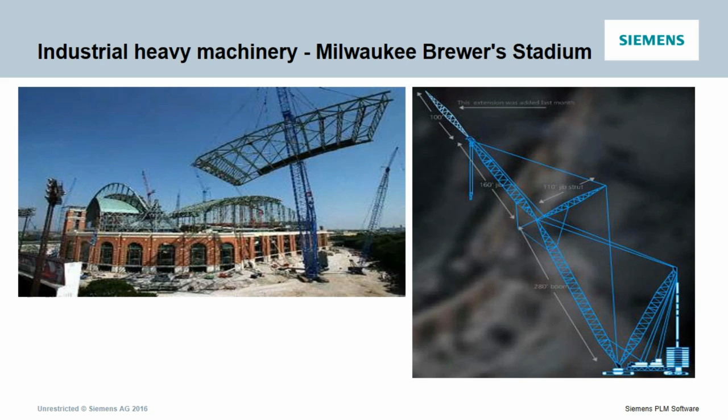This heavy crane was more than strong enough to lift the weight of the roof elements, but still the following happened: at a certain moment, the whole crane simply collapsed.

After an investigation, poor pin design around which the crane rotates was found as the reason for failure. It was designed strong enough for lifting the weight of the roof elements, but still failed after a while. Please follow the link for more detailed info on this case.

In energy production, more and more wind energy is used. The number of wind turbine installations has increased in the last 10 years, as well as the number of accidents. Two types of structural accidents are common: blade failures and tower failures.

Most often, blade failures occur, where either the whole blade or pieces of it break off and are launched in the air. In Germany, pieces of blades are documented to have traveled 1,300 meters, going through the roof and walls of nearby buildings. This is one of the reasons, next to noise issues, why there is a minimum distance of at least 2 kilometers between the turbines and occupied housing areas.

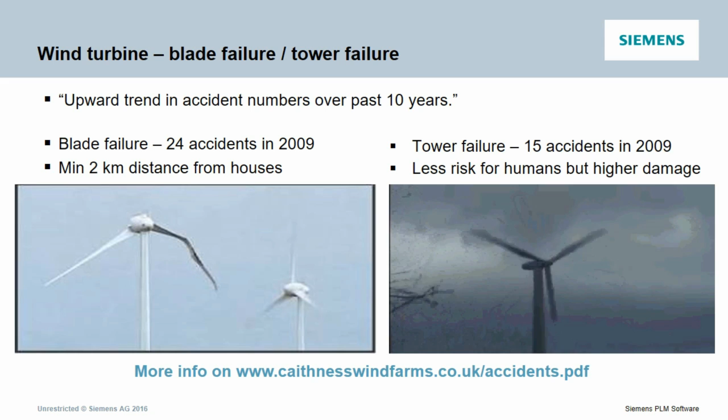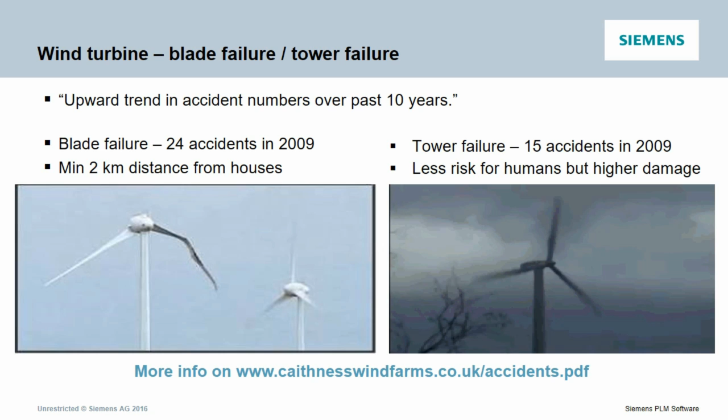A second possible failure is when the whole tower collapses. This can be caused by exceptional storm winds, but also poor quality control and lack of maintenance can be likely causes. In this case, the damage to the turbine can be much more severe because there is a risk that the entire turbine could be destroyed. But the risk to humans is lower since all parts stay within a relatively short distance from the turbine.

As a last example, please check this more recent case of the I-35 bridge collapse in 2007. The bridge was built in 1967 and carried an average of 140,000 vehicles a day, which illustrates the fact that it is a very solid and strong bridge. On top of this, regular visual inspections were carried out, so nobody could suspect the sudden failure of the bridge.

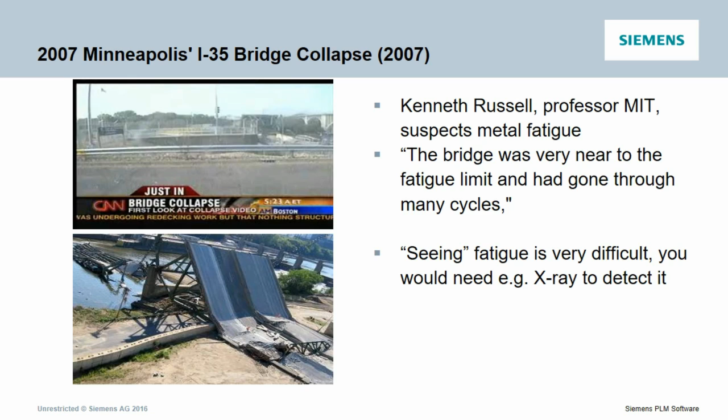So what was the reason? Due to the many cyclic loadings on the bridge, because of the traffic going over it, the bridge reached its so-called fatigue limit and collapsed. This was not discovered during the regular visual inspections, as it required more advanced techniques like X-rays to detect fatigue deterioration. Why did this happen, and after all those years? That is exactly what fatigue is all about, and what we will explain in the next pages.

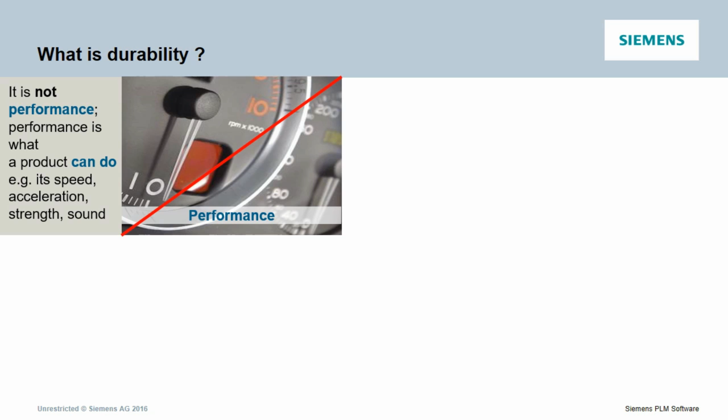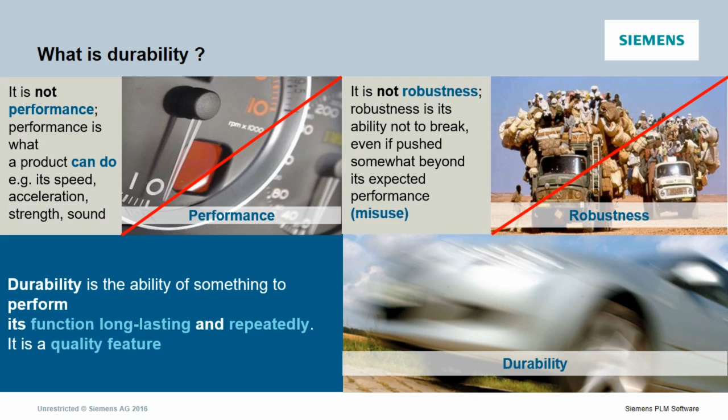So, what do we mean when talking about durability? Or more importantly, what is it not? First of all, durability should not be confused with performance. Performance is the implicit ability of a product, for example, how fast a machine can run or how much horsepower it produces. Durability is also not the same as robustness, which is the ability to withstand high loads without breaking. When we talk about durability, implicitly there is a time factor involved, meaning the product can survive a specific lifespan under normal circumstances.

In short, durability is a measure of product quality. When designing your product and thinking about its durability, please keep in mind how your customer will use it. Do you know where the product will be used? The same car will be used in a variety of environments: the desert, perhaps standard city driving, or in the snow. Do you understand how tough the conditions will be? Driving through potholes and over cobblestones introduces different loads than city or highway driving.

Do you know how fast your product will go? Driving at 30 miles per hour is different than driving at 100 miles per hour. Do you know how often it will be used? A taxi will drive much more on city roads compared to driving a family car continuously on the highway. Do you know how long it should last? Designing a truck which needs to last for 1 million kilometers brings some extra challenges into the picture compared to designing a production car for 250,000 kilometers. Since you always should have a specific end-user case in mind, the above questions are important when building durable products.

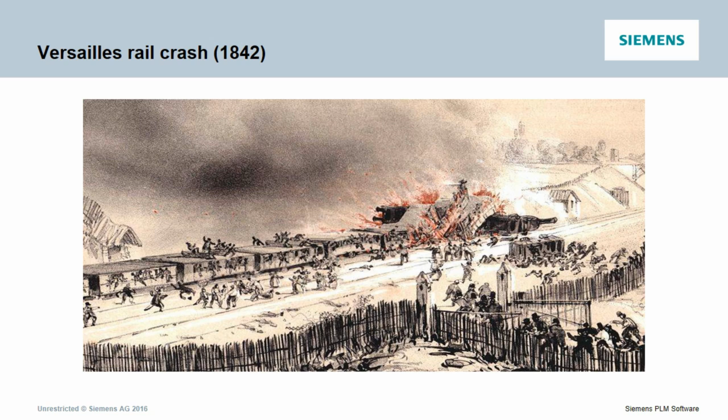In order to understand durability, one needs to study the underlying engineering phenomenon called fatigue. People first started investigating fatigue after the train crash of 1842 in Versailles, a French city west of Paris. At least 55 passengers were killed in this accident, caused by a broken locomotive axle which led the train to derail. Engineers working in the railroad industry started investigating the accident in detail.

Although the axle was more than strong enough to handle the weight of the locomotive, engineers discovered that the cyclic nature of the rolling axle was the cause of failure. As the train moves, the axle rotates, and the full weight of the locomotive pushes down on it. On the surface of the axle, there is a continuous change from tension to compression back to tension within one rotation cycle.

Wöhler discovered back in 1870 that applying these elastic deformations repeatedly would break the axle after a certain number of cycles, even at stress levels far below what's needed to break the part instantly. So cyclic stress turned out to be more damaging in the long term than instantaneous peak stress. Wöhler found that by reducing the amplitude of the applied cyclic stress, the part would survive many more cycles. This behavior became known as fatigue, because it was originally thought the metal got tired after a while.

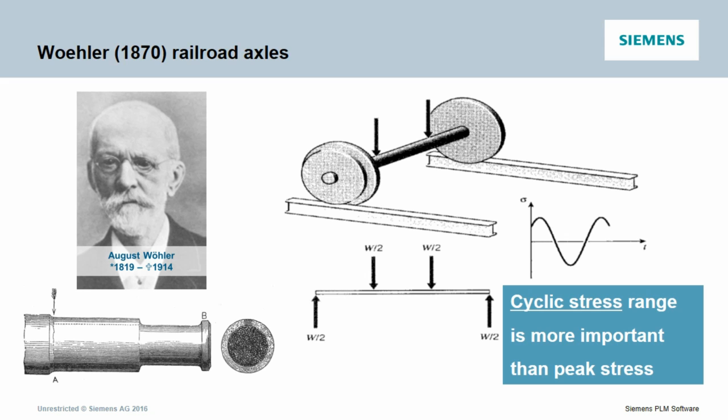The previous example teaches us there is a big difference between static strength and strength after cyclic loading. For static strength testing, a monotonic load is applied and increased until the component or structure fails. The force or static load needed to break the material is called the static strength. Here you see some examples of setups for experimentally testing static strength.

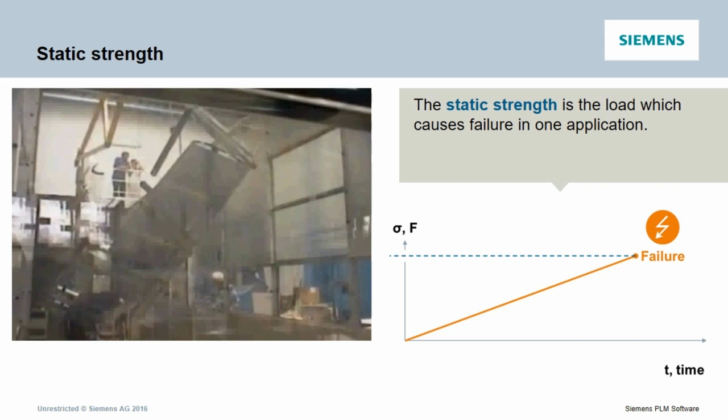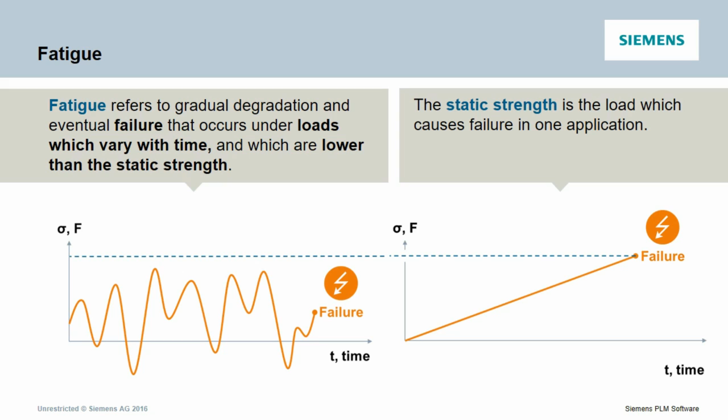Sandbags or cords are used to apply the static loading condition, but static strength is not what we are dealing with when we refer to durability. Instead of a static load condition, the term fatigue always refers to the gradual degradation and possible failure that occurs under loads which vary in time. Typical for fatigue is that failure is not immediate, but only happens after some time, and that this failure is caused by a cyclic loading pattern rather than a monotonic load. In most cases, the loading amplitude is typically lower than the static strength of the material.

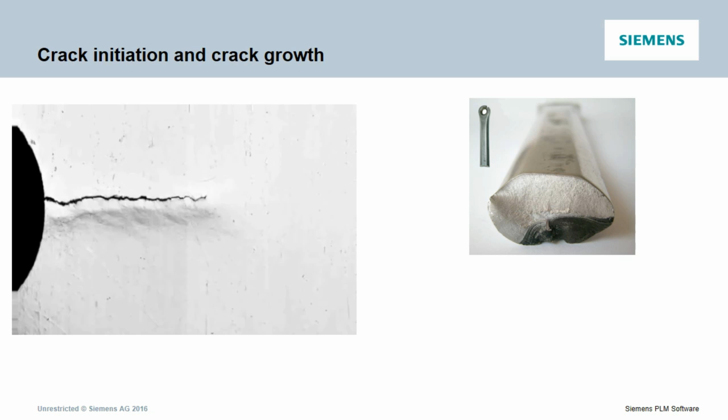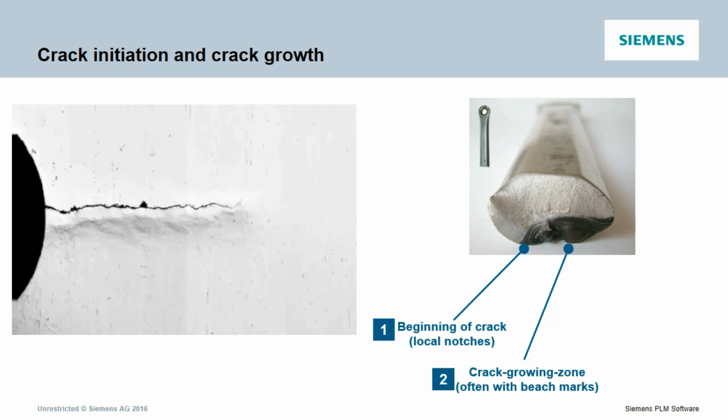The reason cyclic loads cause fatigue failure can be found in what is called crack growth. Crack growth occurs after a crack initiation on the surface, as you can see in the picture on the left. This initial crack can literally grow toward the interior due to cyclic loading, which opens and closes the crack each time. Once the crack has penetrated the material enough, the remaining undamaged surface is too small to withstand the loads, and the material suddenly breaks into pieces.

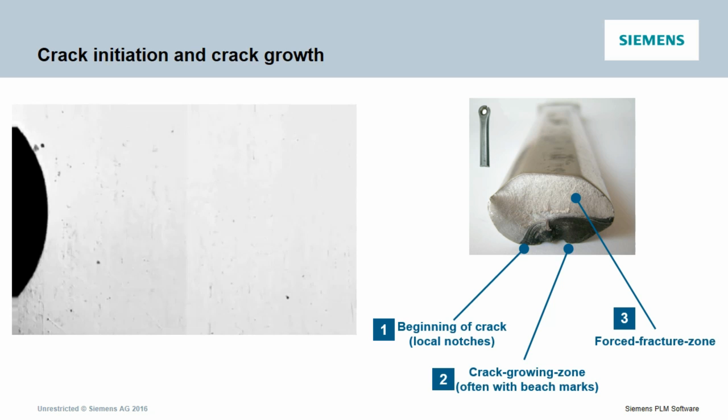This is known as fatigue failure. It is the reason for the apparently sudden failure in all the previous examples. When examining components that failed due to fatigue, one can clearly see the location where the crack started and the area where the crack grew.

On the right, a metal steering arm failed because it did not receive the required final heat treatment. Without this heat treatment, residual stresses remain in the steel, causing it to be 30% weaker than normally specified.

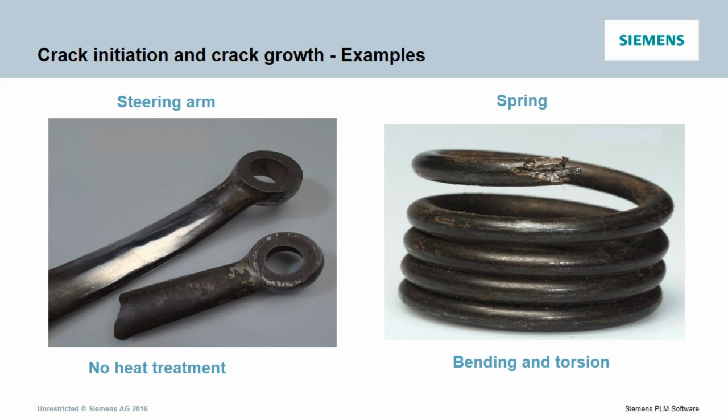The picture on the right shows a truck spring where the loads consisted of a combination of bending and torsion. Here, the crack growth is very complex, and as you can see, the fracture surface is very rough and difficult to see, even when zooming in.

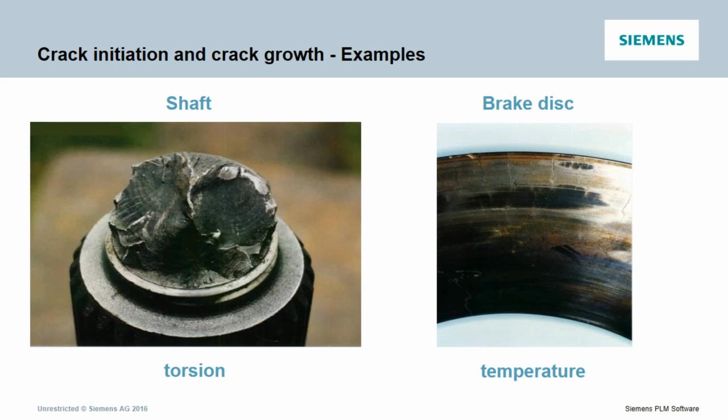This first picture shows a failure in a drivetrain shaft. Due to torsional vibrations and cyclic variations in rotation speed during operation, crack growth occurred and led to failure. The last example displays a brake disc. During braking, friction quickly heats up the metal, and the cyclic heating and cooling started the crack initiation.

What is an SN curve? Imagine the following experiment with some metal paperclips, which you can easily try yourself. Take the end of a paperclip and bend it 45 degrees in one direction, then back 45 degrees in the other direction, and again back to its initial position. You have just applied one cycle over an angle of 45 degrees.

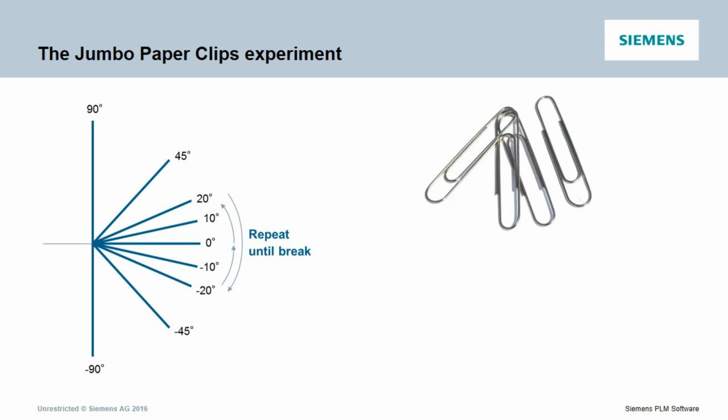This causes a cyclic change between tension and compression of the material. If you repeat this a few times, you will notice the paperclip breaks after a while. Count the number of cycles it takes before it fails. In this example, 7 cycles. Continue the experiment and apply different deformation angles. You'll notice the number of cycles will be different. Actually, the lower the applied angle, the higher the number of cycles needed to break the paperclip. The table shows possible results for angle and number of cycles for this experiment.

If we plot the data points from the previous experiment on a logarithmic scale, the result is similar to the so-called SN curve. In our experiment, we plotted the angle versus the number of cycles, but a true SN curve plots the cyclic stress amplitude S against the logarithm of the number of cycles to failure, N. As the applied angle is proportional to the stress amplitude, a similar curve is obtained.

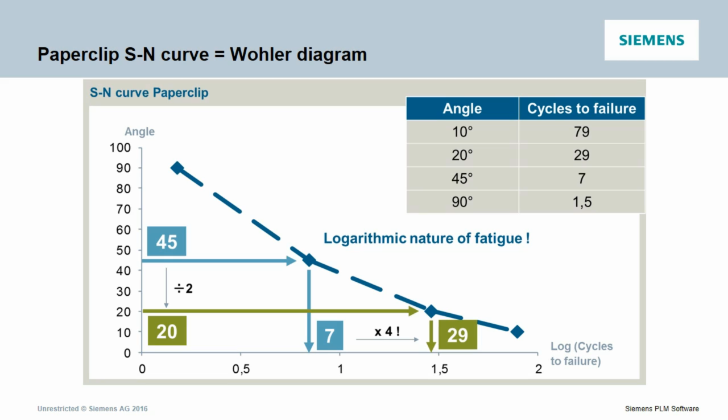An important characteristic of the SN curve is the logarithmic nature of fatigue. If we reduce the load by a factor of 2, from 45 degrees to 20 degrees, the number of cycles to failure does not increase by a factor of 2, but by a factor of 4, from 7 cycles to 29 cycles approximately. This logarithmic relationship between stress and cycles to failure was discovered in 1910 by an American engineer named Basquin, who further studied and analyzed the work of Wöhler.

The logarithmic nature of fatigue means that a slight decrease in applied loading results in a huge improvement of fatigue life. A typical K-factor, or Basquin coefficient, determines the relationship between load and expected lifespan. For steel, this factor equals 5, while for aluminum it equals 7, and for welding it equals 3.

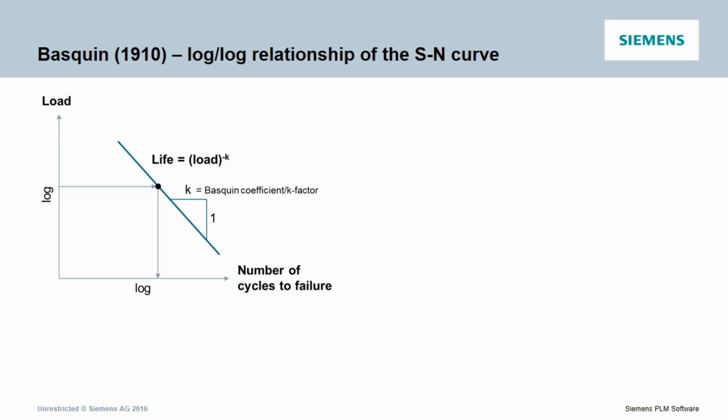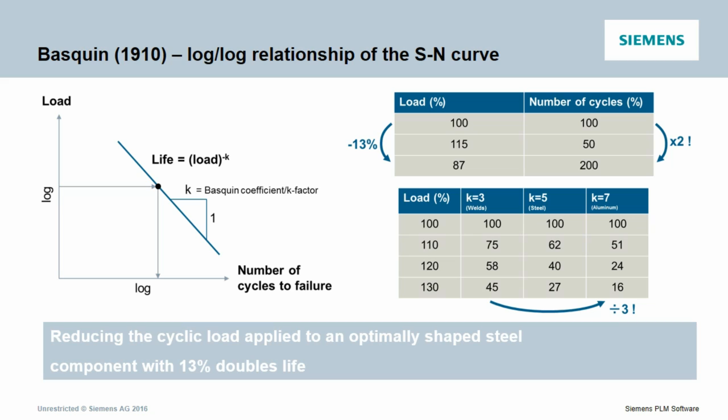The table on the right shows the effect on steel. Increasing the load by only 15% will reduce the lifespan by 50%, whereas reducing the load by only 13% will double the expected lifespan of the component.

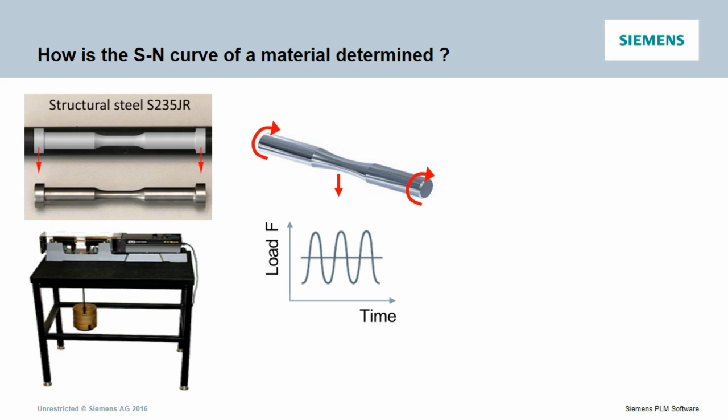In practice, the K-factor and SN curve are determined in a laboratory environment using a test bench. A round sample is rotated and bent by hanging a fixed weight, applying a known constant stress level. As the sample rotates, stress is applied externally on the entire sample, varying from maximum tensile to zero to maximum compressive and back. The test system counts the number of rotations, or cycles, until the specimen fails.

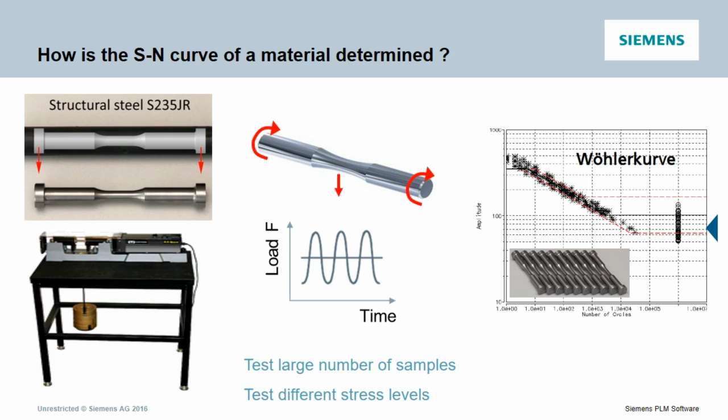A large number of tests are performed at each stress level in order to statistically average the results. On the right, you see a typical test sample. Its optimized shape and highly polished surface guarantee an optimal lifetime.

When looking at the SN curves from different materials, another important difference can be observed. In the case of steel, below a 300 MPa stress level, the material will survive at least 10 million cycles without failure. This stress level is called the endurance limit and appears as a horizontal line on the SN curve. As long as you keep the stress level below this endurance limit, the steel component will survive forever.

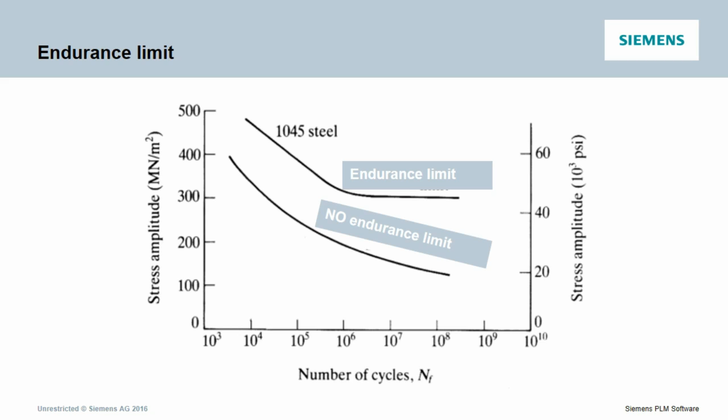Note that not all materials have an endurance limit. For example, with aluminum, even a very low stress level will lead to failure as long as the number of cycles is high enough.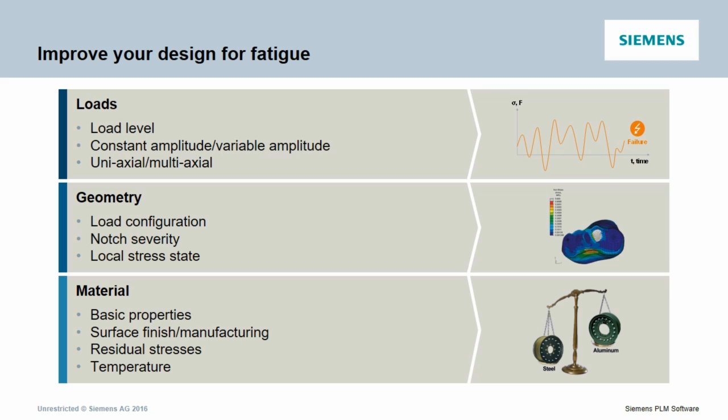Which parameters influence fatigue? In order to improve the fatigue lifetime of a component, one can work on three influential parameters: the loads, the geometry, and the material. Let's first look at the loads.

Remember that with the logarithmic nature of the SN curve, reducing the loads will drastically extend the lifetime. Until now, we only talked about fully reversible loading, meaning the loading is symmetrical around a zero mean stress level. Please be aware that in reality this is probably not the case, and other parameters like mean stress or multi-axial loading can influence the fatigue life.

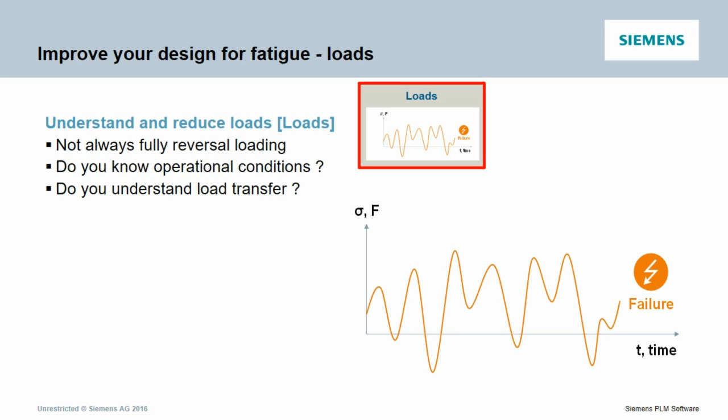So we return to one of the basic questions: how is the customer using the product, or what are the loading conditions in real-life situations? Using realistic loading conditions is crucial when predicting a realistic fatigue lifetime. It is also important to understand how the external loads are transferred to the inside components, and to know for each component what the specific loading conditions are.

Measuring realistic loads is extremely important, but how can we measure these loads? In fact, load data is collected by measuring strain. Strain is defined as the relative change in length of a component due to tension or compression. In order to measure this change in length, a so-called strain gauge sensor can be used.

A strain gauge consists of a very long resistive wire that is embedded in a thin foil and glued on the surface of the structure. The wire is typically made of a copper-nickel or nickel-chrome alloy. When the structure deforms, the length of the resistive wire changes as it gets longer for tension and shorter for compression. Since the change in length influences the electrical resistance of the wire, measuring this resistance gives an idea about the stress levels in the material.

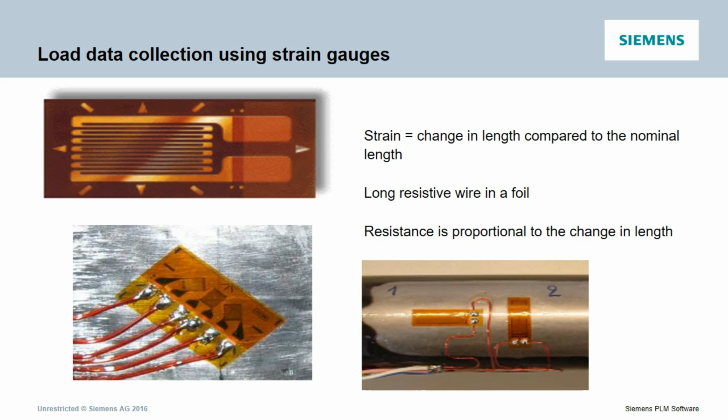Typically, the measured resistance change is very small, and therefore also the typical strain values. That's why we often use microstrain as a unit, as the amplitudes are often in the range of 10 to the minus 6. Often, multiple strain gauges are combined into a Wheatstone bridge to compensate for temperature variations, or in a rosette configuration to have information for different directions.

Next to understanding the loads, a second way of improving the fatigue life is by looking at the geometrical shape of the component. The shape itself will contribute to how the stress is distributed inside the component. High localized stress concentrations can occur around notches or sharp edges or wherever the material is very thin. This means you have to be careful when trying to reduce weight by reducing material. Maybe the static strength is still okay, but the risk for fatigue will increase.

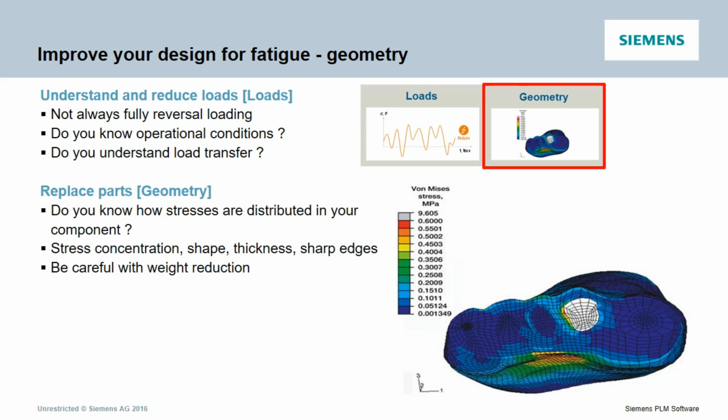High localized stress means increased risk for crack initiation and propagation and final fatigue failure. Testing, as well as simulating the local stress distribution, can help build competence and better understand the fatigue behavior of certain components. Next to the loads and geometry, material can highly influence the fatigue life of a structure.

It is obvious that a certain material is stronger than another. A soda can made out of steel would be stronger, but also much heavier than the aluminum version. On the other hand, soda cans don't have to survive a lot of fatigue cycles, so aluminum is a perfect material. Next to the material itself, also other factors can influence the fatigue behavior.

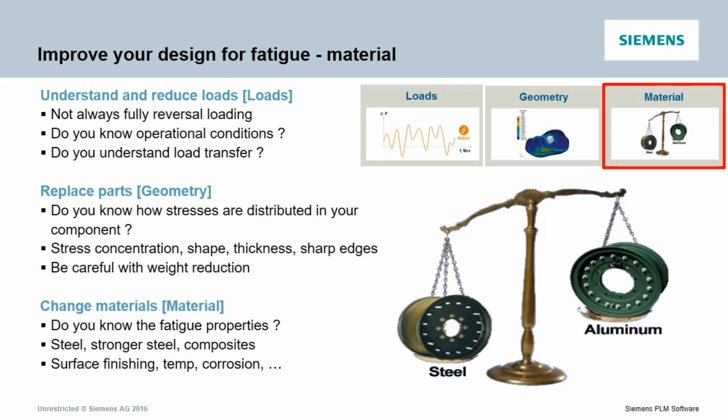For example, the quality of the surface finishing. Other reasons for accelerated degradation could be corrosion, chemical environment, residual stresses from the manufacturing phase, or even the environmental temperature. A metal component will behave differently and have a different lifetime in Arctic temperatures than in tropical environments.

How to design against fatigue. There are three possible strategies when designing against fatigue: infinite life, finite or fixed life, and damage-tolerant design.

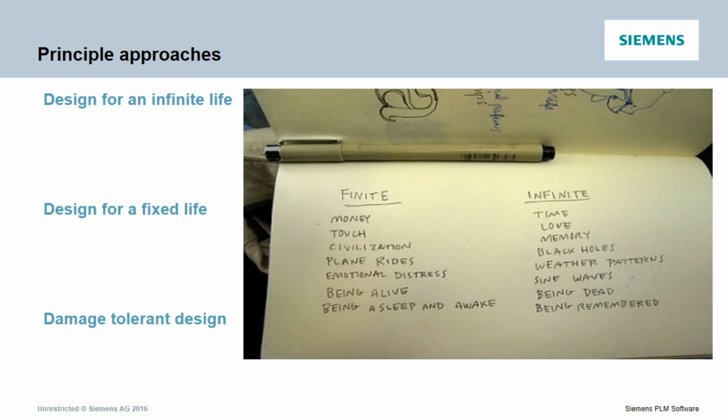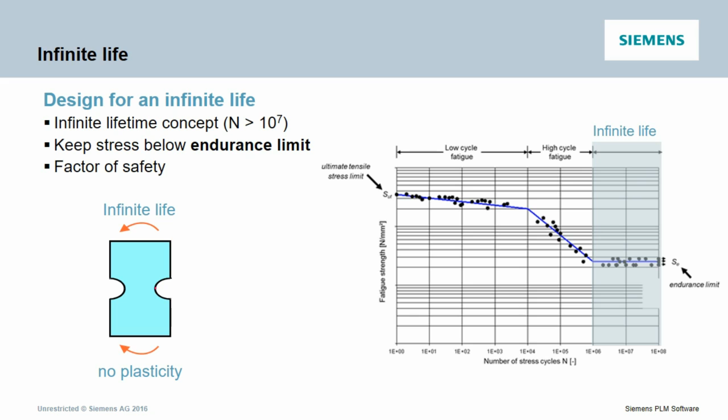An additional safety factor is typically used in order to stay well below the limit and assure infinite life without failure. In this case, the stress levels are low enough for all deformations to be elastic, and there is no plastic deformation at local notches. Please remember that not all materials have an endurance limit. For example, aluminum cannot be used for an infinite life approach.

In order to assess the infinite life, the following approach is taken. Under loads, for the loads, it is enough to look at the minimum and maximum condition and apply a stress concentration factor to compensate for local high stresses.

Under geometry and material, for the material properties, one starts from the ideal SN curve of the polished specimen and accounts for the real surface finishing and loading conditions. A real-life endurance limit will be used instead of the one from the original SN curve.

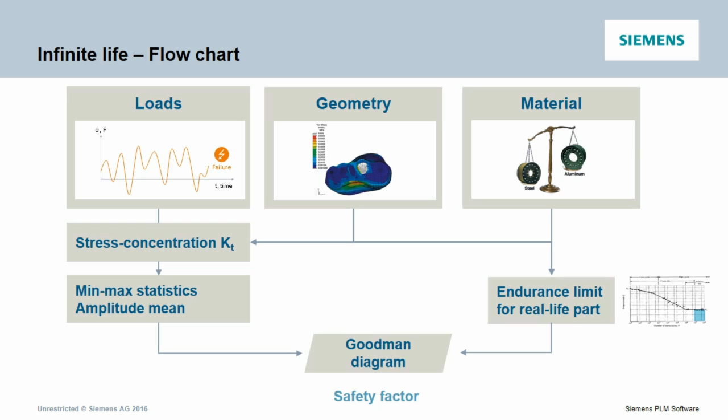Loads, geometry, and material properties are combined in the Goodman diagram, and this results in a calculated safety factor which will tell if the component will survive or not.

A second approach is to design for a fixed or finite life. This means that the lifetime is known to be limited, but at least the user can be instructed to replace the component with a new one after a specific time. This is the concept of a safe life design, as a safe lifetime can be guaranteed based on completed fatigue calculations. Typically, a distinction is made between high cycle and low cycle fatigue.

High cycle means the component is designed to survive between 10,000 and 10 million cycles. Here the deformation is primarily elastic of nature. Low cycle means the component is only able to survive a maximum of 10,000 cycles.

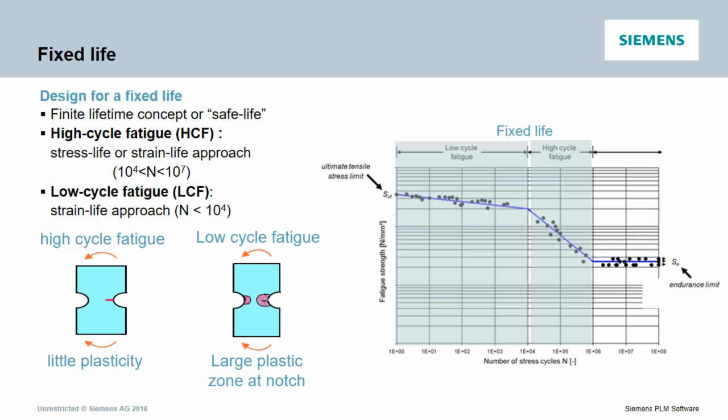Note that many components do not need to survive that many cycles. For example, something loaded once a day for 20 years only undergoes 7,300 cycles.

In order to assess the fixed life, a slightly different approach is taken. Instead of just looking at minimum and maximum loads, a more advanced analysis needs to be done, called rainflow counting. Using rainflow counting, a complex loading sequence with variable amplitudes is decomposed into a number of loading sequences with fixed amplitudes. Let's have a look how that works in practice.

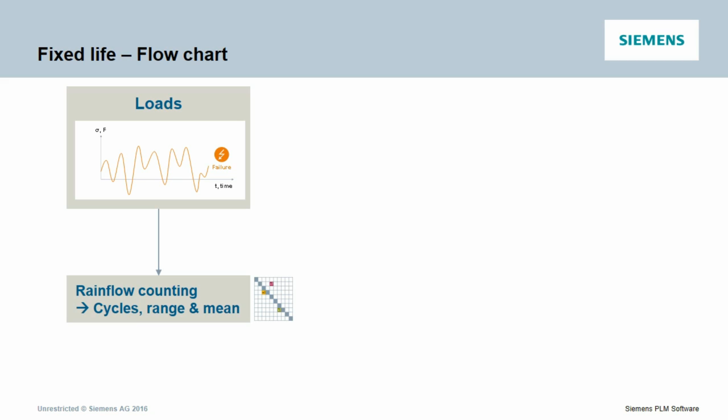Rainflow counting was introduced by the Japanese professor Endo. It is a technique used to analyze variable loading conditions for fatigue life prediction. Starting from the original and complex loading sequence, the amplitude of the loads is first divided into a number of classes or bins. Each combination of a local maximum and minimum is then isolated, and the number of these from-to transitions is counted and put in a rainflow matrix.

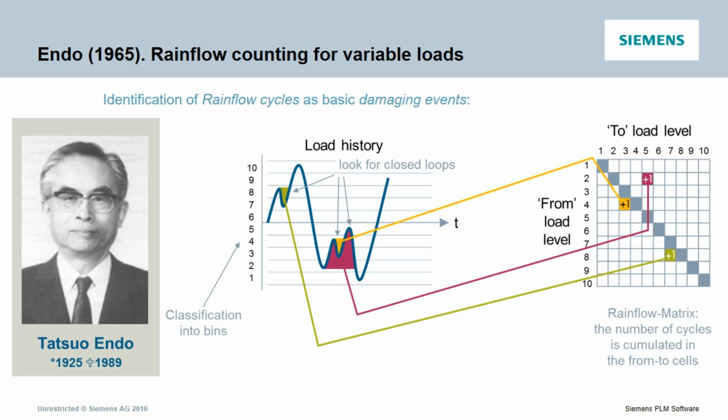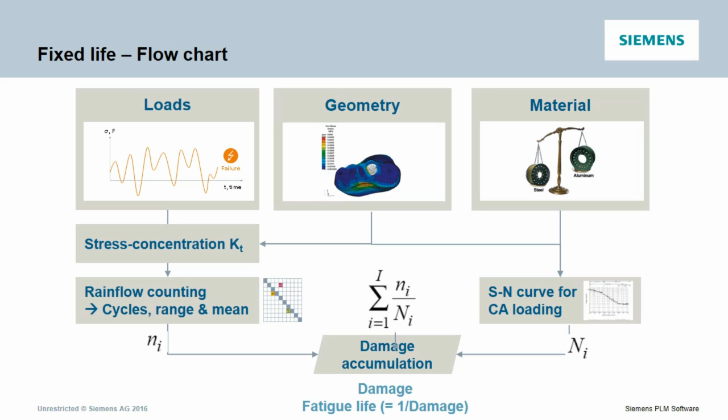The rainflow matrix shows the number of occurrences or cycles from a certain level to a certain level. Based on the number of cycles in the rainflow matrix and the SN curve, the damage effect of each cycle can be calculated. Using Miner's rule, the different partial damages can be summed up into a total accumulated pseudo-damage. As a result, one obtains a fatigue life factor, which is the number of times one can repeat the initial loading sequence.

The last approach is called the damage-tolerant design. In this case, prediction of the lifetime is not done, but the user is instructed to do regular inspections and look for cracks. Once the cracks exceed a critical length, the part should simply be replaced.

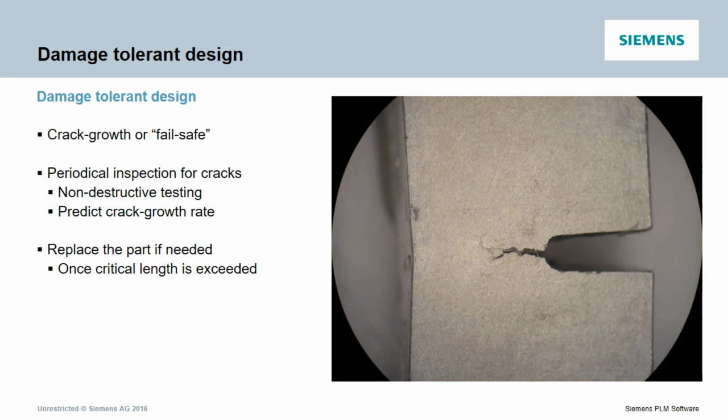For the inspection, typically non-destructive testing like ultrasonic methods are used. Once a crack is discovered, an accurate prediction of the crack growth rate until the next inspection is needed to decide on component replacement.

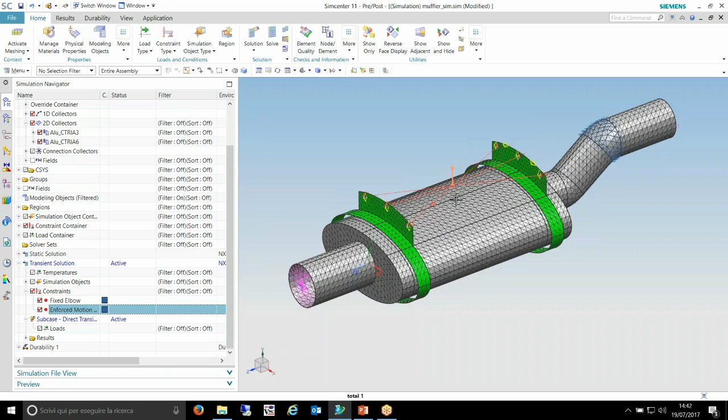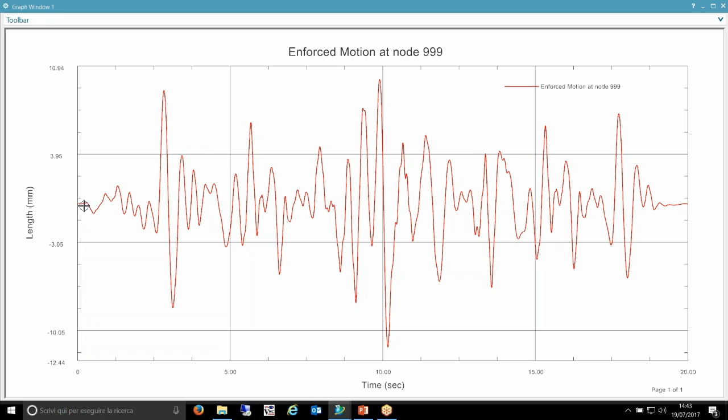In questo modo vado a vedere quello che potrebbe essere un profilo tipico di un tratto di strada. Questo lo devo ripetere però tantissime volte, diciamo un 10, 10 milioni di cicli. Quindi abbiamo bisogno di studiare una fatica particolare, nel senso che è composta sia da una parte a breve termine, sia da una parte a lungo termine.

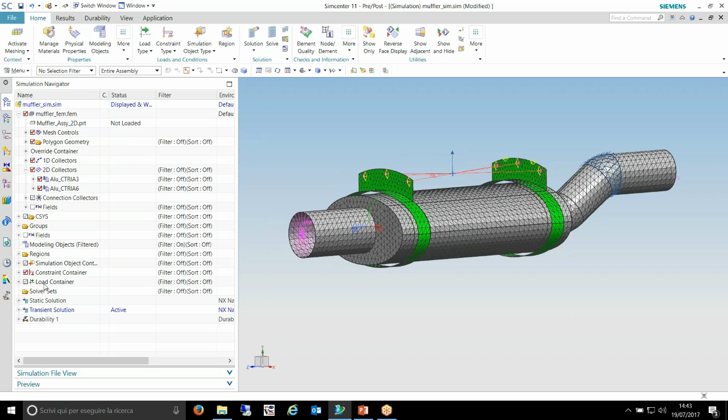Quindi utilizzeremo, infatti sono stati salvati, se andiamo a vedere dei risultati per quanto riguarda la parte statica, quindi analisi statica lineare, sia gli stress che gli strain. Per quanto riguarda la soluzione transitoria invece abbiamo salvato soltanto la parte di stress, in quanto è quella più interessante, visto che lavoriamo ad alto numero di cicli, non ci interessa più il discorso dello strain.

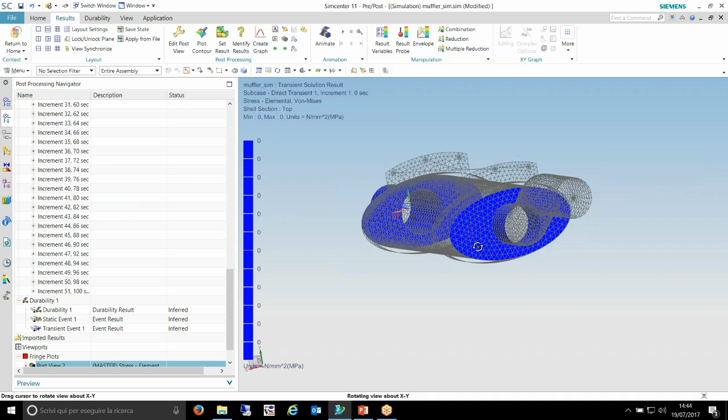In questo caso, se attiviamo l'animazione possiamo vedere, sulle iterazioni, dalla prima all'ultima, posso dare il via, vedete come in base alla posizione in cui ci troviamo c'è una zona che si carica più o meno.

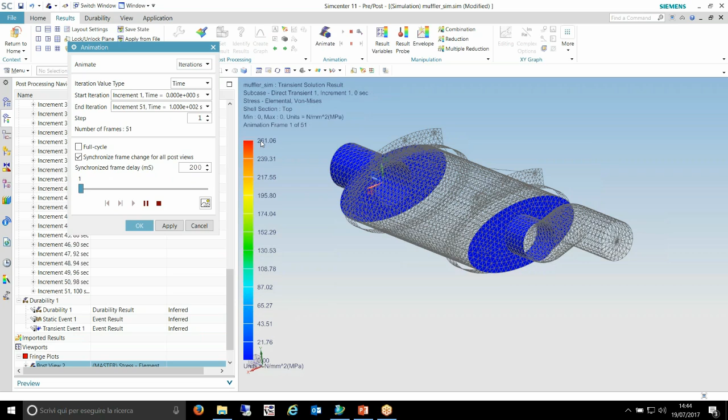Qui lo stress è molto più basso, abbiamo detto che eravamo sui 300 di snervamento, siamo a 260, siamo al di sotto, quindi in una zona diciamo tranquilla.

Ok, una volta che abbiamo questi dati partiamo con l'impostazione vera e propria dell'analisi a fatica, quindi torniamo al nostro modellino e andiamo a creare con i menu di durability una nuova simulazione. La chiamiamo Mixed Time Mixed perché andiamo a mescolare entrambi i nostri casi e su questo andiamo a creare i nostri eventi. Cosa possono essere?

Allora, intanto qui veniamo aiutati da questa interfaccia che è decisamente molto intuitiva. Andiamo a selezionare che tipo di evento. È un evento statico, quindi è un evento ad ampiezza costante, anche con una sigma media presente, ma comunque costante nel tempo, e quindi ci baseremo sulle soluzioni di statica lineare, tipicamente in questo caso la SOL 101, oppure un'analisi

transitoria che potrà prendere i dati da tutte quelle analisi transitorie che possono essere, ad esempio, una risposta nel tempo, quindi una dinamica time history, oppure un non lineare nel tempo. Infine abbiamo l'ultimo caso, che è quello utilizzato in particolari settori come quello automotive, che è il random event. Il random event prevede di prendere i dati da una analisi PSD, quindi una power spectral density, significa poter studiare vibrazioni random, qualora io non sappia a priori esattamente cosa va a succedere.

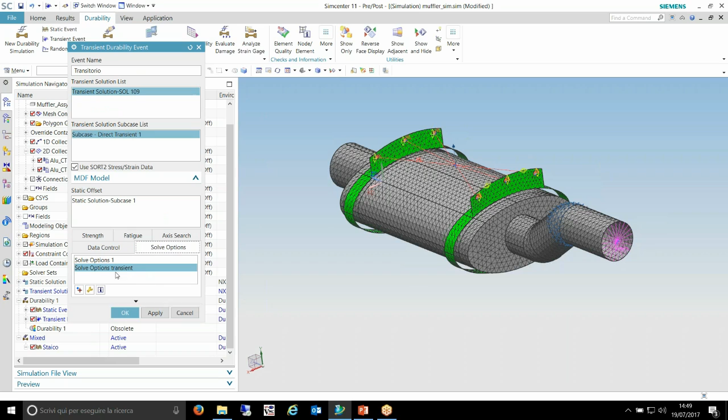Per quanto riguarda le solve option abbiamo una leggera differenza perché su questo modello abbiamo creato un gruppo per far vedere la possibilità di limitare le zone di calcolo, in modo da non dover risolvere tutto, che potrebbe essere dispendioso come tempo, ma andiamo a risolvere soltanto nelle zone predefinite dove sappiamo che lo stress è più alto, identificato già a priori con l'analisi statica e con l'analisi transitoria.

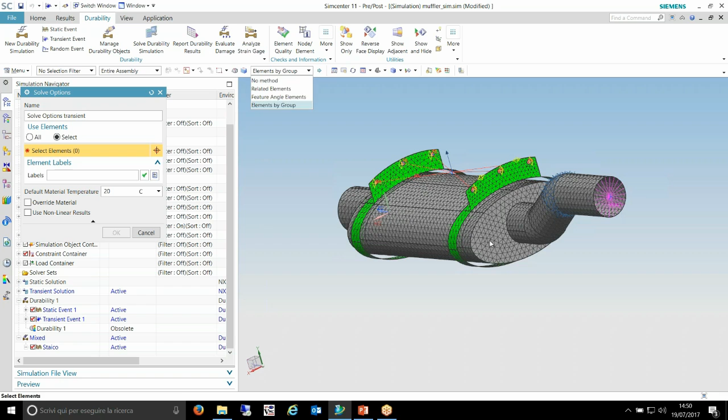Possiamo tranquillamente limitarci, e questo si fa in modo velocissimo: basta selezionare element by group, e una volta definito il gruppo mi basta cliccare un solo elemento e mi vengono presi correttamente tutti quanti. Ok, abbiamo creato il nostro oggetto e siamo pronti.

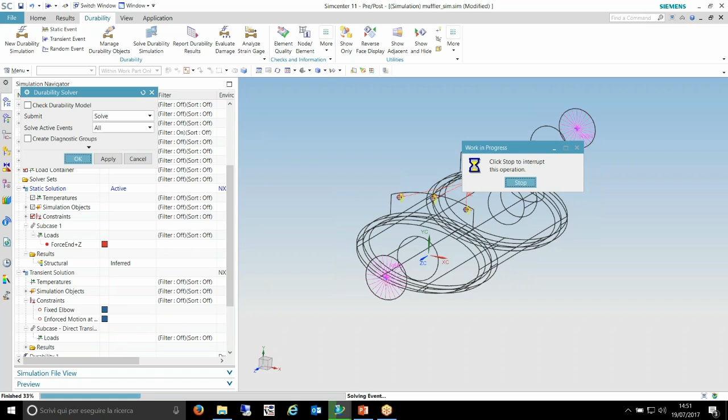Benissimo, a questo punto non ci resta altro che dire risolvi. Possiamo risolvere tutto, solo una parte e così via, diamo l'ok, parte la soluzione, viene suddiviso, vengono eseguite le analisi.

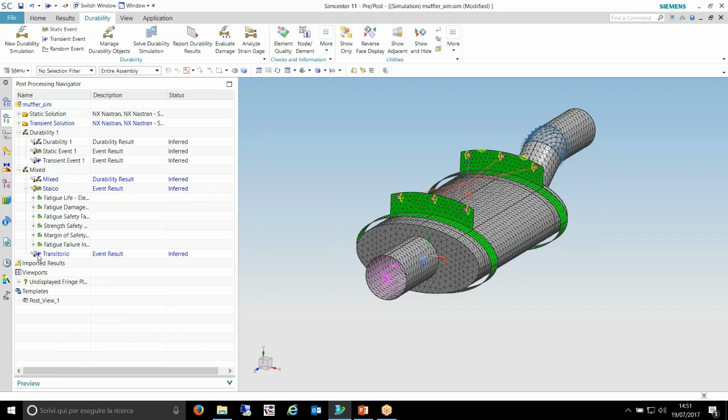La cosa interessante è che quando definisco più di un elemento di fatica all'interno del modello, quindi più di un evento, avrò nel mixed, abbiamo scritto statico, lo possiamo correggere al volo, abbiamo la nostra analisi e avremo i risultati sia per lo statico sia per il transitorio separati, e la somma.

Se andiamo a vedere, abbiamo plottato l'andamento del fattore di sicurezza per il caso statico, quello che avrà le deformazioni maggiori. Capita spesso che con i fattori di sicurezza sia da invertire la griglia, perché non stiamo parlando di stress dove più alto è più pericoloso, ma è il viceversa.

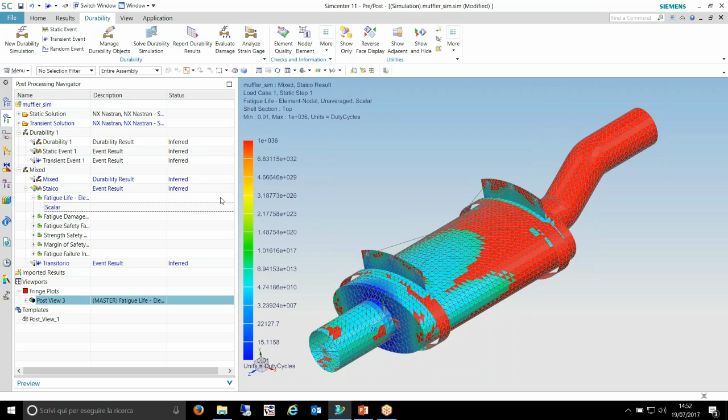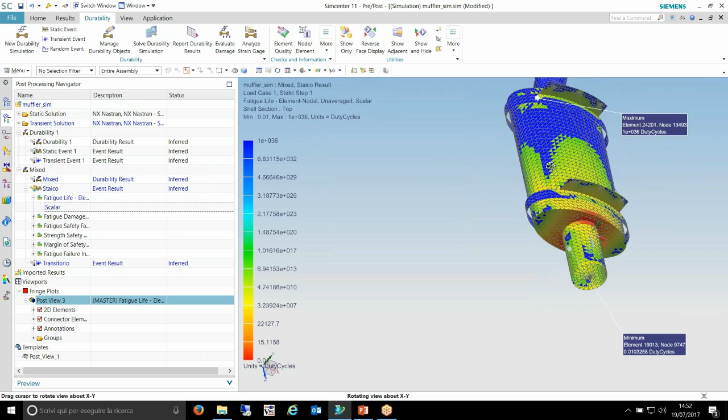Quindi andiamo a impostare al volo la nostra legenda, possiamo semplicemente dirle di invertire lo spettro e identifichiamo facilmente la zona. Qua abbiamo anche la possibilità di attivare le annotazioni per vedere esattamente dove è il massimo e dove è il minimo, e avere ben presente dove sono le varie zone.

Lì è il massimo, ci interessa il minimo per quanto riguarda il fattore di sicurezza, che posto a 0,01 mi significa che questo potrà rompersi.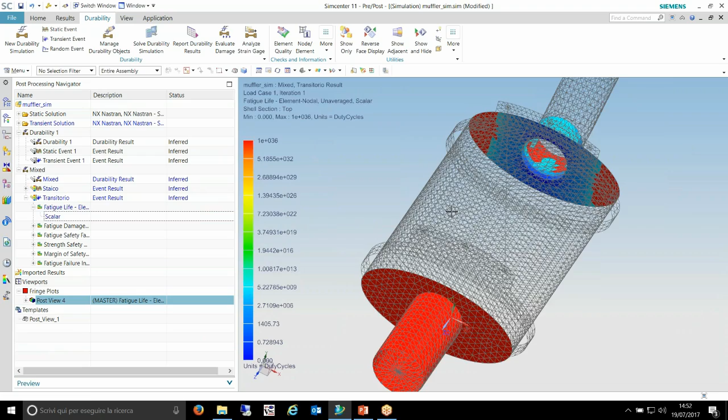Se vado a richiamare il transitorio vedrò qual è la vita fatica attesa per l'analisi transitoria. Anche in questo caso abbiamo un bel problema nella zona più sollecitata, dove questo risulta essere superato.

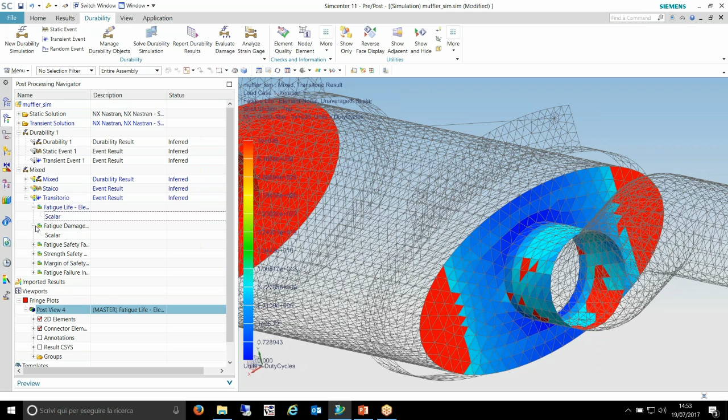Quindi un'analisi molto dettagliata di tutto quello che succede, con la possibilità col mixed di andare a vedere l'ultima cosa, che è la somma, cioè cosa succede quando sottopongo il mio pezzo a entrambe le cose, quindi quale delle due è peggiorativa nel nostro modello.

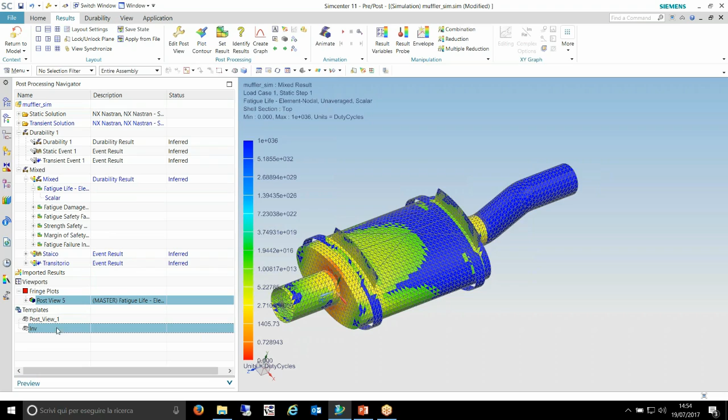Tutte queste impostazioni che facciamo per la visualizzazione possono essere salvate come template e riutilizzate al volo in caso di bisogno. Andiamo a salvarla come template, new template, lo chiamiamo invertito, inv, così mi basterà cliccare due volte su quello per richiamare al volo questa determinata suddivisione in sezioni.

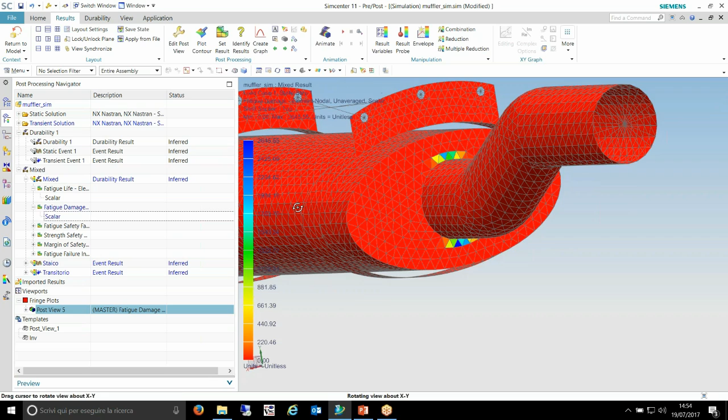Come dicevamo prima, abbiamo la vita fatica attesa, abbiamo il danneggiamento dove si sviluppa maggiormente, e quindi possiamo vedere quale dei due casi è più critico, tra quello statico o quello ripetuto, e così via.

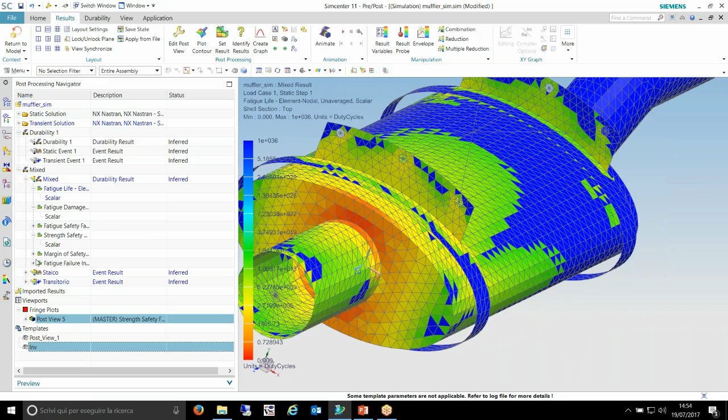Abbiamo tutto quanto lo strength safety, che è il fattore di sicurezza rispetto allo stress, quindi quanto sono lontano dalla curva, i margini di sicurezza, e abbiamo il failure index, che è la zona che mi dà più alta probabilità di rottura ed è ben evidenziata.